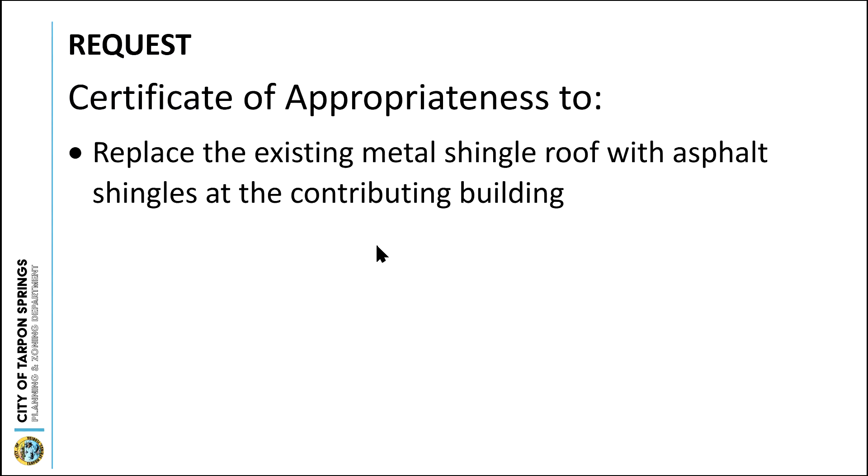It is a frame vernacular. It is a contributing structure. And they are requesting to replace the existing metal shingle roof with an asphalt shingle roof.

I will briefly go through our standards of review. The first one that's really relevant to the property is the relationship of the structure within the historic and preservation district and its relationship to the open space and the street, and scenic views, vista, and streetscapes.

So the application does not propose any alterations to the historic roof line. However, a change of materials would alter the appearance of the streetscape. There are 2 adjacent residences to the north that have architectural shingle roofs.

The Knapp House, which is an 1886 Queen Anne revival, and a 1909 Craftsman at 103 South Spring. The adjacent 1915 frame vernacular structure to the south of the subject property at 127 South Spring has a standing seam metal roof. So the HPB should determine if this change in material would have an adverse impact on the streetscape.

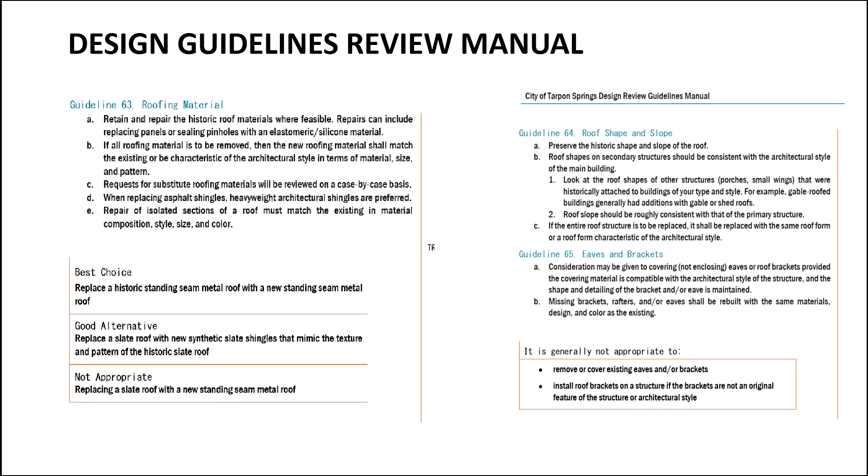Guideline 63 states that the best choice is always to repair, and after that would be to replace with the same material as what was historically there. Generally, it's not appropriate to replace with different materials. However, as I stated previously, an asphalt shingle roof is not inconsistent with a frame vernacular structure in our districts. So based on a strict interpretation of our guidelines and criteria, I'm recommending denial of application 2535.

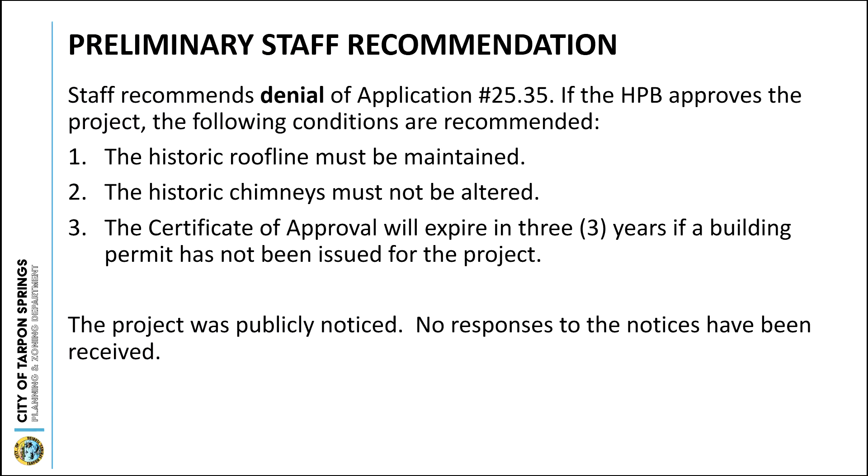Should the HPB determine that they want to approve this project, I would suggest conditions that the historic roof line must be maintained, the historic chimneys will not be altered, and that the certificate of appropriateness would expire in 3 years if no building permit has been issued. The project was publicly noticed and no responses were received. With that, I will enter my staff report and presentation into the record and offer to answer any questions.

So, maybe I'm missing them. Was there a spec on the shingles? I see timberline. Is it a 3-tab? Is it dimensional? That was not provided in the application. What you have in your backup is what I got. Okay, thank you. So you can maybe ask those questions of the applicant. Thank you.

Carolyn, do you know if those metal shingles that are on that roof now, if there was just a repair needed, do you know if those are even available anywhere? I know there's tons of them in architectural salvage stores for sure. And largely with those metal shingles, it's really about the sealant, not the actual metal that's corroded too much, though occasionally that will happen given our environment. But it's not something you can go buy at Lowe's for sure. But they do exist and could be obtained. Okay, thank you.

Any other questions for Carolyn? No? Okay, let's move on to the applicant.

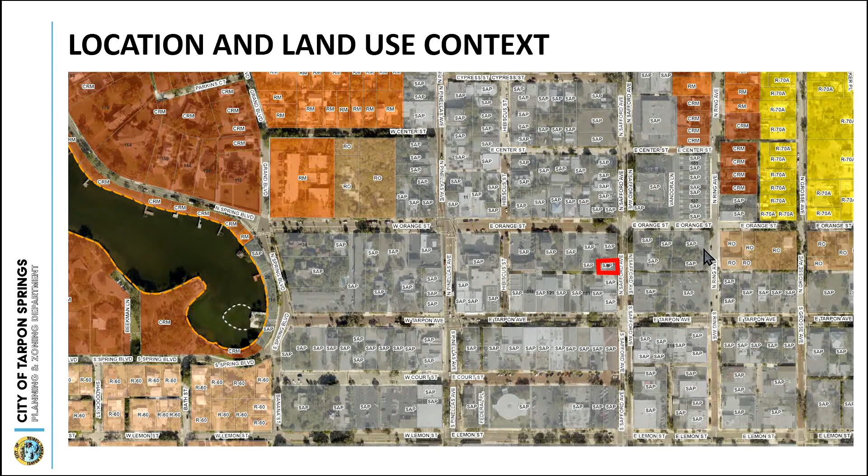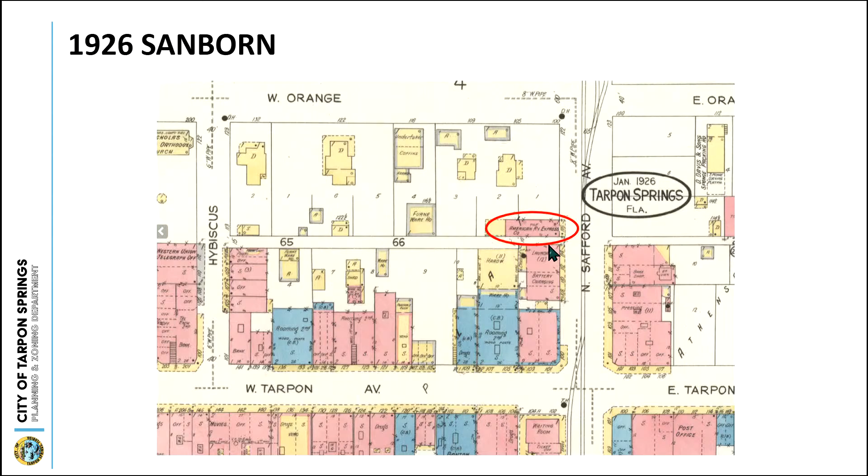This slide gives basic information about the subject property. It's in our special area plan, T4A residential and retail office, currently used as a restaurant, and again it's a contributing masonry vernacular structure. So the certificate of appropriateness being sought is to enclose the non-historic covered patio addition, and the addition of this patio was approved by the HPB.

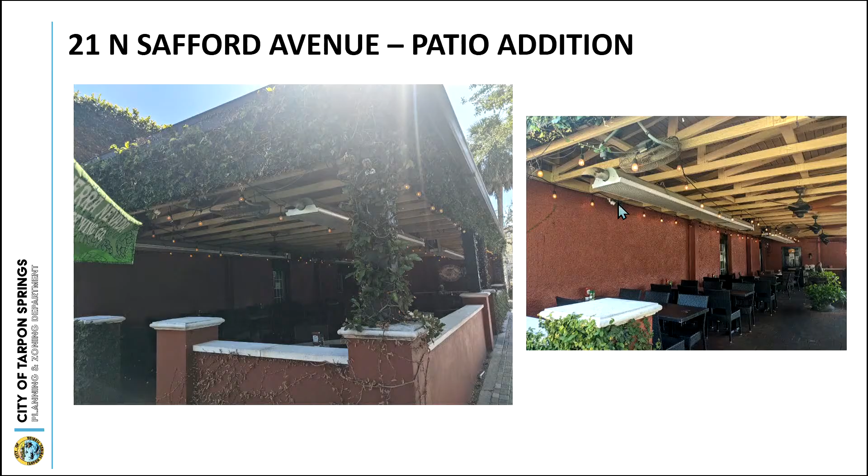A view of the patio proposed for enclosure. It's giving you a little bit of context, and some close-ups of the non-historic patio addition. This is showing you some things about the historic structure.

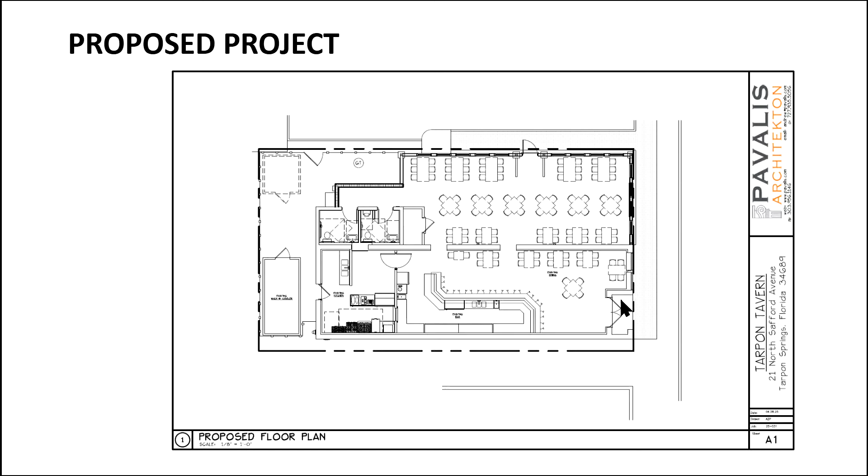So our relevant standards of review are the new construction consistency. So the height and width of the proposed enclosure wouldn't alter the height or width of the non-historic porch or the historic property. Number two, windows, doors, and entries.

The proposed enclosure, again, is a non-historic addition. It was done fairly well. It's subordinate to the historic structure. It utilizes the same stucco cladding that the historic structure has, with a simple design that's complementary to the historic structure.

And the proposed enclosure would kind of follow that, utilizing the wood surrounds that are similar to what's on the historic structure. The windows would be similar dimensions, not the exact same, but complementary. And it would really, the windows and doors, although modern materials, would be complementary to those on the historic structure without pretending to be historic themselves.

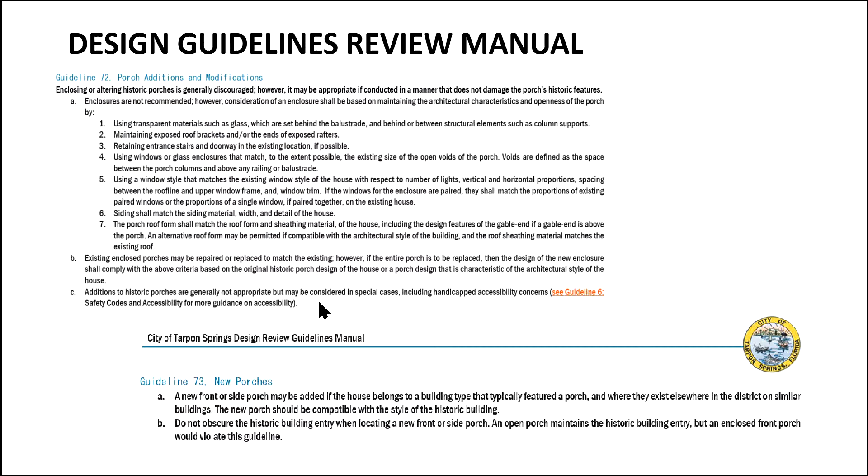And these are just the design review guidelines for porch additions and modifications. So since it's not a historic porch, we don't need to be quite as stringent. But again, we just want to look for that kind of consistency within the district and complementary to the historic structure.

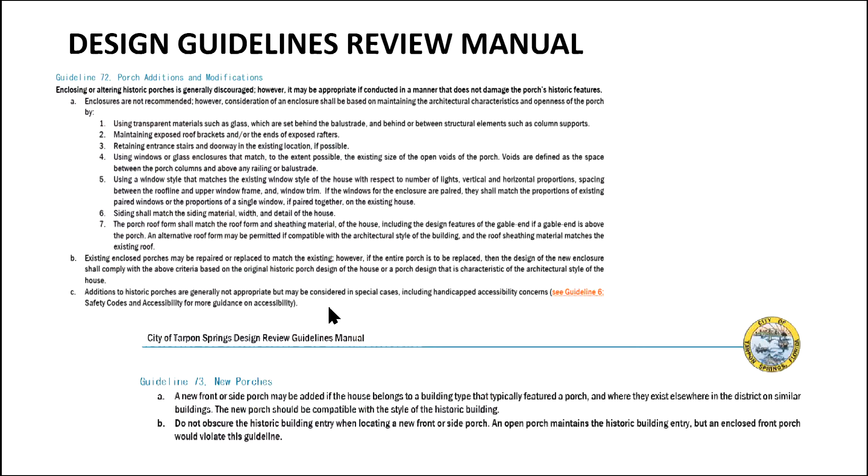So for an addition, modification, yeah. With that, I'm recommending approval of application 2535 with our standard condition that the certificate of appropriateness would expire in 3 years if a building permit has not been issued.

The project was publicly noticed. There were some inquiries about it, but no formal responses to the notice were received. With that, I'll enter my staff report and presentation into the record and be able to answer any questions you might have.

Thanks, Carolyn. Any questions for Carolyn? Pretty straightforward. Okay.

All right, how about the applicant presentation? No? You don't want to make a presentation? Chicken. Well, come on up anyway, in case there's some questions. I do have a question for you, so. Yeah, introduce yourselves.

I'm Dan Jenkin. I own Cobblestone Management Group, which owns the building, and Tarpon Tavern I also own. And Andrew Pavlis, the architect.

You had some questions? What are the windows? Are those aluminum or are they vinyl? They're going to be vinyl coated. Impact, I take it. Yes. Yep.

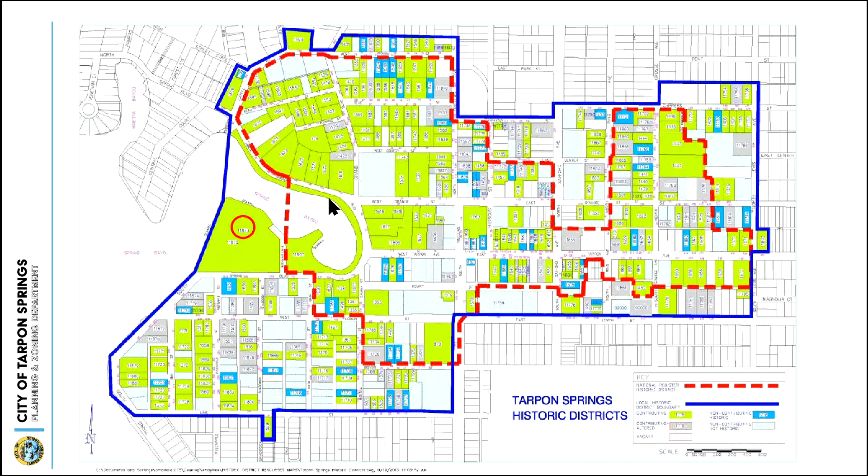Carolyn: Yes, so this is application 2536. This is showing the location and land use context of the subject property. It is the recreation center that is located within Craig Park. And this shows the location of the subject property within our local historic district. Just gives some basic information about the subject property.

It is currently used as recreation open space and will continue to do so. The architectural style of the subject building is a circa 1936 masonry vernacular building. This building was constructed as part of the Works Progress Administration project that improved Craig Park, and the building was built to be a recreation center, and it exists as such today. It has had a few alterations over the years, however, enough integrity remains for it to be considered a contributing structure in our local historic district.

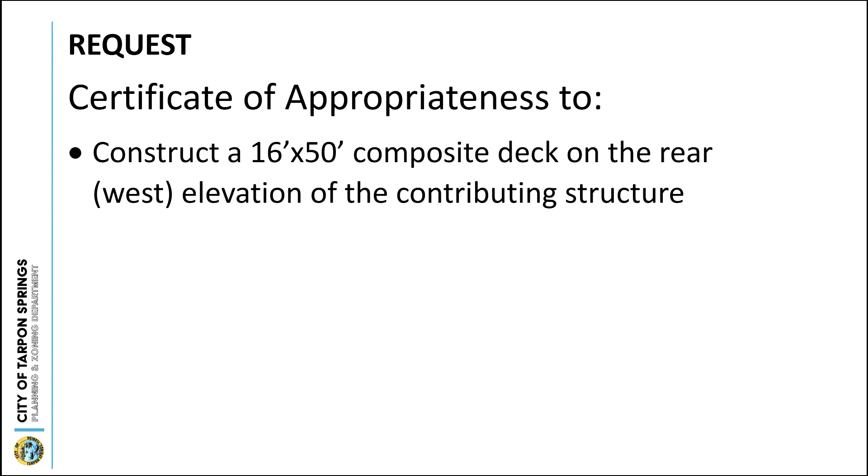So the applicant, which is the city of Tarpon Springs, is seeking a certificate of appropriateness to construct a 16 by 50 foot composite deck at the rear on the west elevation of the contributing structure. So that would be behind the building.

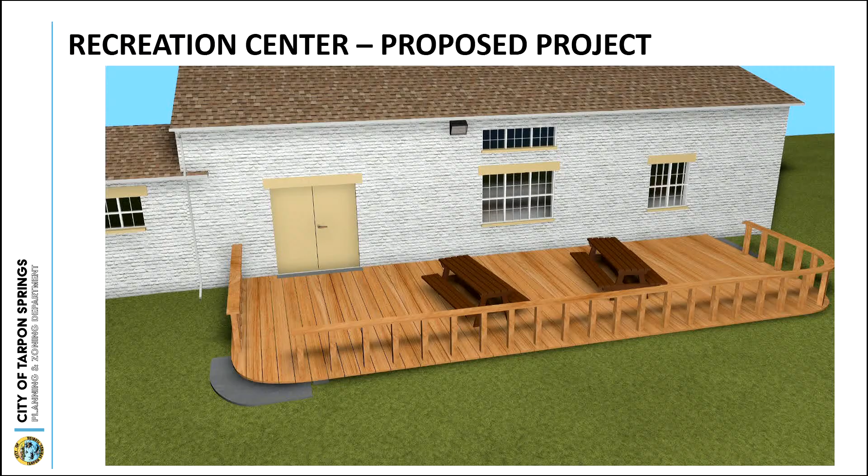With respect to our standards for review, new construction consistency, the height and width of the proposed deck is similar to decks found throughout the historic district of buildings of similar size. With respect to the neighborhood and district context, it would be potentially visible from the public right-of-way on Beekman and potentially from South Spring Boulevard.

Given the site's unique location within Craig Park, you'd see it whenever you're in the park in that area. You could also potentially see it from Spring Bayou if you're out there kayaking. So it would have a minor alteration on the vista of the area, and the HPB should determine whether or not that change is significantly adverse.

With respect to architectural features, no distinctive or historic architectural features would be altered with this proposal. One of the benefits of this project is that it's completely reversible and would not alter the historic building in any significant way. It generally conforms with the Secretary's guidelines because the addition is at the rear of the building and would not destroy any historic materials or make alterations to the historic structure.

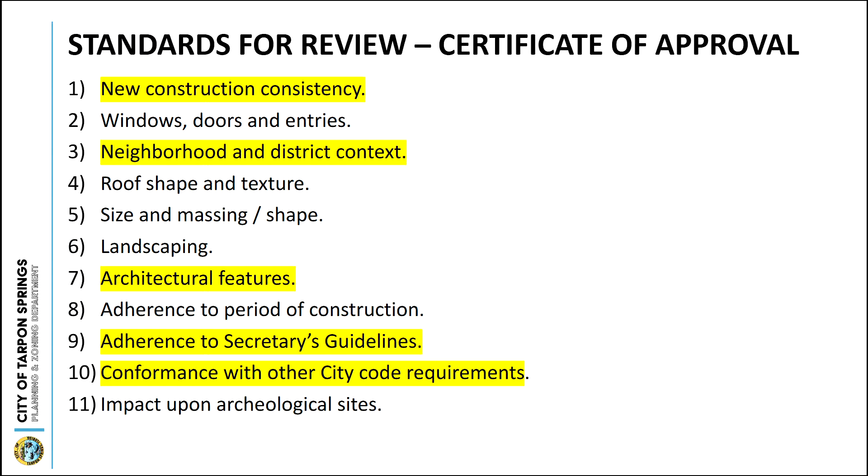The proposal would certainly conform with city code requirements and is generally consistent with the land development code, and is generally consistent with the historic preservation element of the comprehensive plan.

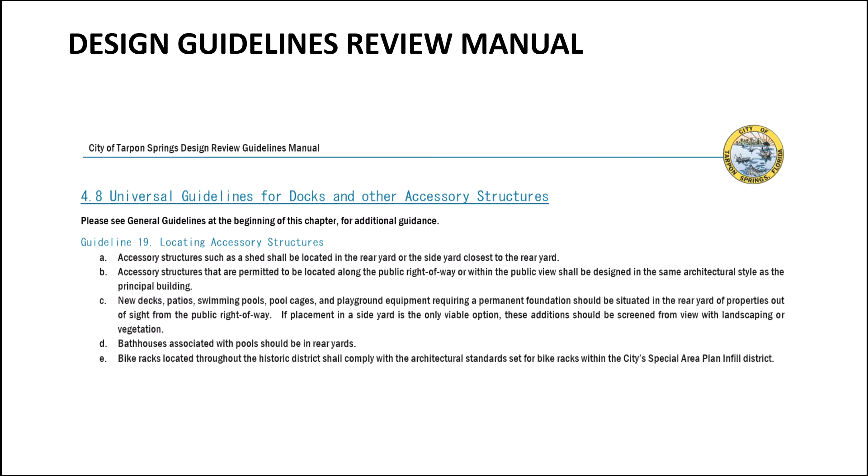With that, staff is recommending approval of application 2536, and I will enter my staff report and this presentation into the record and answer any questions you may have.

Thank you, Carolyn. Any questions for Carolyn?

What are the railings, what is that made out of? It's all proposed to be composite materials.

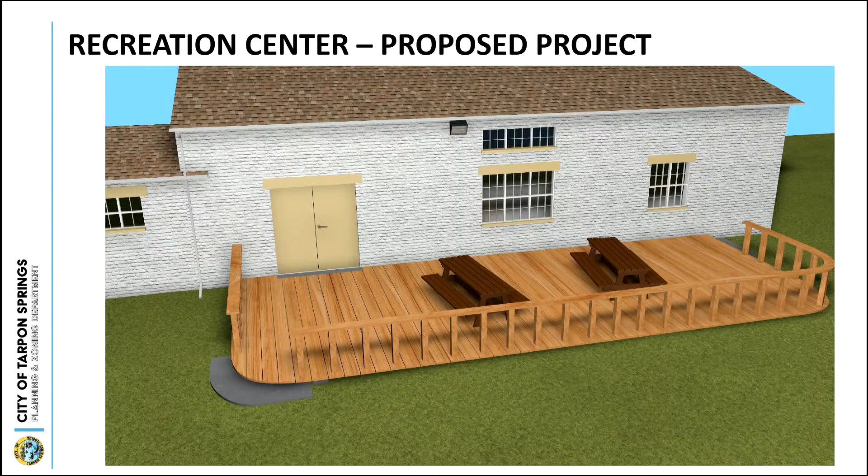Caroline, could you bring up that picture of the new... oh, there it is, okay. Wow. Okay, and that'll be on the bayou, pretty. Okay, any other questions?

Okay, do we have an applicant? We do.

Hey everyone, my name is Jamie Taylor, Recreation City Superintendent with the city. Appreciate you being out here and checking out the proposal here.

Any questions? No? Looks pretty straightforward. Right. Easy enough, I'll be quiet then. Thank you. Thank you.

Okay, any public comments about this project? No? Okay, we'll close the public comments and bring it to the board to discuss. If I may, I did neglect to tell you, we did get a couple of inquiries about the project, but the only formal response we received was a notice of no objection to the project. Yeah, actually I thought you did say that, but okay, that might have been for the last one.

Any discussion? Okay, Michelle, you're on a roll. Okay, hang on, let me get back to where that page is. All right, so this is application 25.36, recommend approval with staff's recommendations.